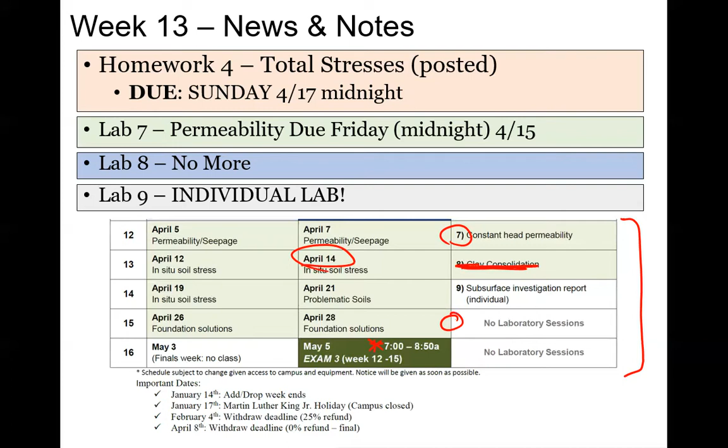Did want to go over exam 2 recap. Overall, it's kind of cool. It was better than exam 1. So good job, guys. Actually, you guys did much better than last semester's exam 2. We did see an increase.

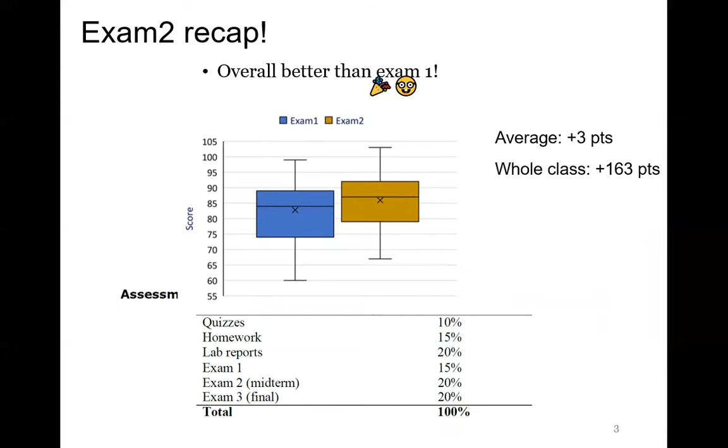You guys know I love a good old box and whisker plot. On average, it was over 3 points increase. The whole class, if you sum up how you did compared to exam 1 to exam 2, everyone, there was a net positive 163. For those of you who maybe didn't do as well as you'd hope on exam 2, don't pay too much attention to the Canvas grade that automatically calculates, because that's missing the lab reports. Your lab reports, the cumulative of your lab reports counts as an exam, basically.

Another big area to remind you guys of, the homework is 15%. So this homework coming up, please complete it, because we only have 4, maybe 5 homeworks. If you're missing one completely, that takes a big chunk out of it. If you haven't submitted a homework yet and you'd still like to, please come talk to me, and we can work on something for partial credit at least. Just wanted to remind everybody of the course assessment percentages, and to not rely on Canvas, because the lab reports are a little different.

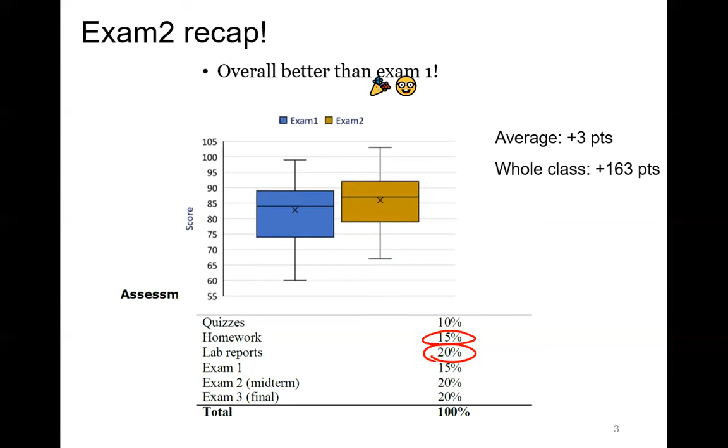I did want to review just a few aspects of the exam. If you want to go into more detail with the problems, or understand my grading scheme or anything like that, I'd be happy to talk with you guys in office hours. Just send me an email or stop by my office hours, and I'd be happy to go through your tests in more detail. Just a few of these things.

This one was kind of a trick question, and that's why I only took off 1 point if you got it wrong, because what this is looking for is classification, and a lot of you guys saw that you need to calculate the plasticity index, which is the liquid limit minus the plastic limit.

You then have to check the A-line criteria, right? We know the liquid limit is greater than 50, so it's going to be a high plasticity, but it could either be a clay or a silt. And all of this stuff here, we see that it's actually above the A line. So upon just initial investigation, just looking at this, you'd be like, okay, above an A line, it's a CH.

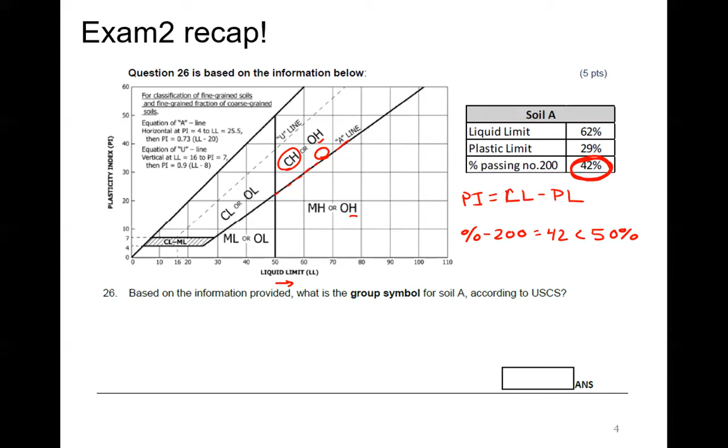But the thing to look for here that they like to put on the FE and on the PE is this one little detail that the percent passing, or the percent minus 200, is 42 or whatever it is, but it'll be less than 50%. This is like a really easy thing that they like to put on the PE and FE because it's just this one detail. So since it's less than 50%, this means it's a majority sand soil, right?

Because remember, USCS, this dividing line is plus or minus 50% passing the 200 sieve. So for the USCS, it's just the majority. So if 51% is less than the 200 sieve, the majority is a fine, so we call it a fine soil. If 51% is retained on the 200 sieve, then the majority is a sand, so we call it a sand soil.

So that's why this is not a CH, but instead this would be an SC, a clay sand. So for clay sands or for silty sands, these are 12 to 50% passing. So anything within 12 to 50% passing here.

I can hand them out after class, so don't worry about it. Anything from 12 to 50% passing is going to be a SC or an SM. In Florida, we come across SC or SM a lot because of this. Like 12 to 50% is a pretty big window, right? So a lot of times you could even get what seems like a clay in your hands, but it's actually an SC. So if it was below this line, then this would be an SM. So it's SC or SM.

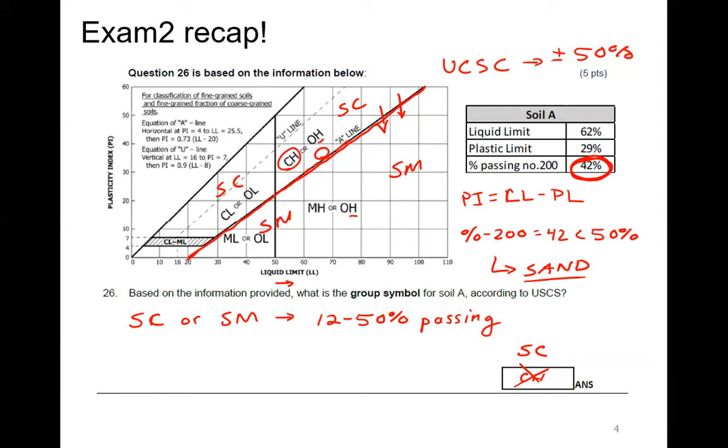All right, the other one that I saw some issues on was this flow net. I know usually flow nets, the examples we've seen is flow moving horizontally, but flow nets can also be used in any direction, right? And this is a really common application for dewatering, like a trench or something.

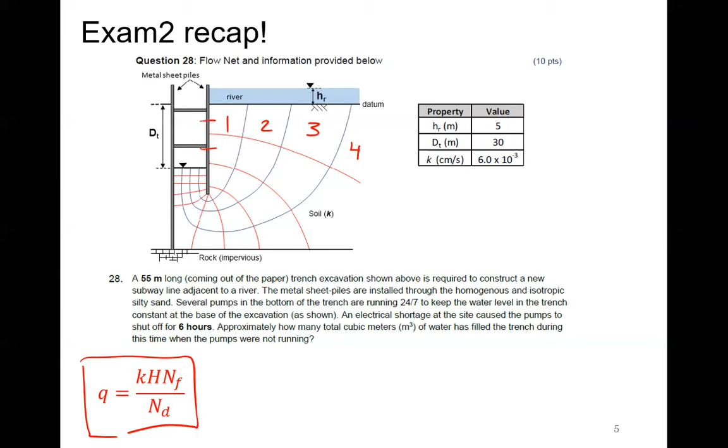So the big area that we have to remember—a lot of you guys saw that there was no issues counting the flow regions, so 4 flow paths and then all the drops, I think there's like 10 or something, I don't remember. But what we have to remember is this H is the difference in head.

And if you ever need to worry about, oh, I can't figure out what this is, just look at the difference between the triangles. So between the triangles here, we have one elevation here, this is a triangle, and we have one down here that the water is keeping in. So our H, our total head difference, is both of these combined—so the HR plus the DT. So it's 35 meters. Just keep that in mind.

These types of problems, again, are really popular on PE and FE because you have to think—they'll give you all these dimensions and you need to either add or subtract to determine the right difference in head for this. The other thing that I want you guys to always do is follow units. I always say that, and it's something that I didn't do in undergrad.

I didn't really learn until grad school, but literally 70% of engineering problems can be solved if you just put the units in, know what you need to find, and know either to subtract, multiply, or divide to get those units.

So we know for this, we need to find cubic meters of something. If we put the units into this value, our K is, let's just say, in meters per second. Our H is in meters. And our NF and ND are just unitless, they're just numbers. So this means our q is what is called a flux, meters squared per second.

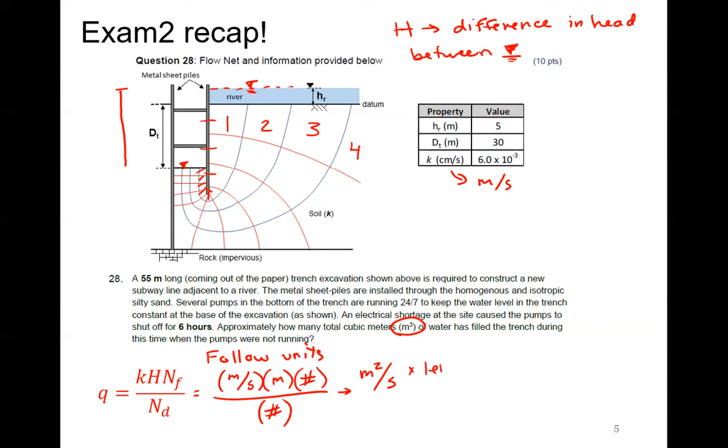So if this is the equation we know for flow net, and we need to get cubic meters, obviously we need to multiply this by another length. So that's where this 55 meters comes in. The 55 meters is length out of paper, coming out of the screen. So if we multiply this by another meter, then we'll get meters cubed per second. And so this is a flow rate, how much volume of water is moving over a certain time.

And we're given the time is 6 hours. So if the pump shut off for 6 hours, this means we would just multiply this by 6 hours and then put it into seconds or whatever we need to. So our seconds would cancel out and what we would get is our volume.

So you don't need an equation, you don't need to memorize anything here. All you need to do is follow the units and think about what you need to find and what you need to either multiply or divide by to get to that.

I saw a lot of you guys doing like the unit stoichiometry setup. If you're not familiar with this kind of setup, I definitely suggest doing this because it's easier, in my opinion, to cancel things out.

You don't have to set it up like this, but especially going from hours to days and stuff, like if we had seconds, you do 60 seconds is 1 minute, 60 minutes is 1 hour, whatever that is. So in my opinion, I think this is an easier way to keep track of your units.

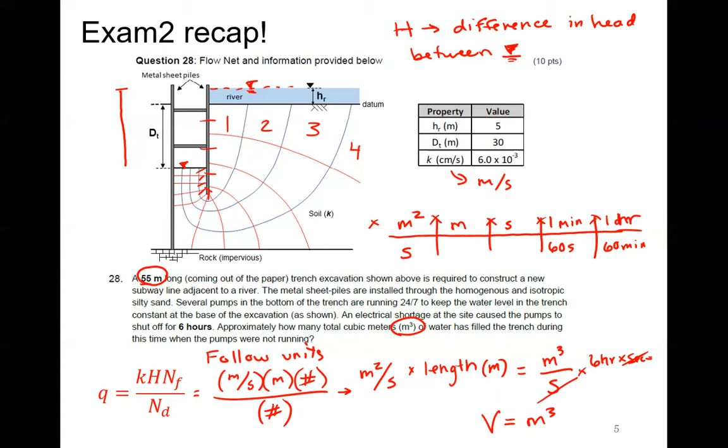Okay, cool. All right, today we're going to be talking about capillary rise and how it changes the stress conditions. Luckily, I think a lot of you guys have covered capillary rise before, was it in fluid mechanics, right? So that's from a pipe standpoint or something, but in ground conditions, this is super, super important.

So we've talked about already from the previous slides and lectures how the groundwater changing can either increase or decrease our effective stress. And again, just to recap, effective stress is the important stress for geotechnical engineers, because we are designing strength as a function of stress, and this stress is going to change with groundwater conditions. So we want to design our strength off of a stress that is taking out the groundwater, just assuming that it doesn't add or subtract any stress. That's why we do effective stress instead of total stress in our design considerations.

So this is assuming one thing though. This is assuming if we were to look right at this soil interface here, that it's a perfect line, right? Like we have 100% saturation versus 0 saturation, so completely air dry, and then it magically turns into 100% saturation. You can probably imagine that this is not the idealized case, right? Like we've already seen how moisture content is a thing in soil. Clays will have moisture content, sands will generally have moisture contents.

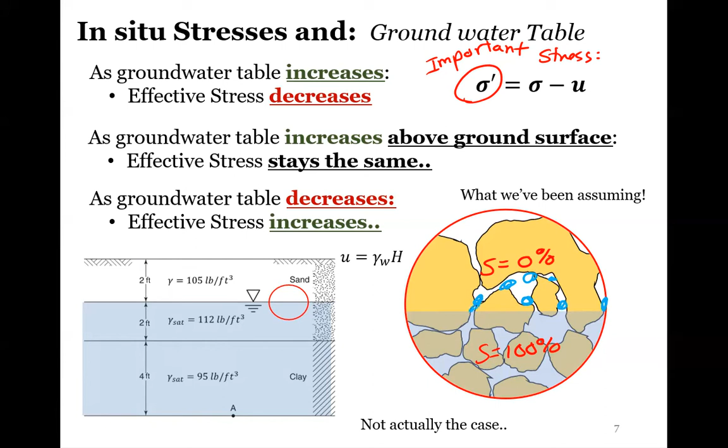So there's going to be some type of water that is in this pore space above our groundwater table that we need to account for, that can affect the stress.

And what we know from 5th grade science, there is water surface tension as a property of water, the cohesion and the adhesion. Did anyone do that thing where you take a penny and put a bunch of water droplets on it? My wife was a science teacher and I remember always doing that.

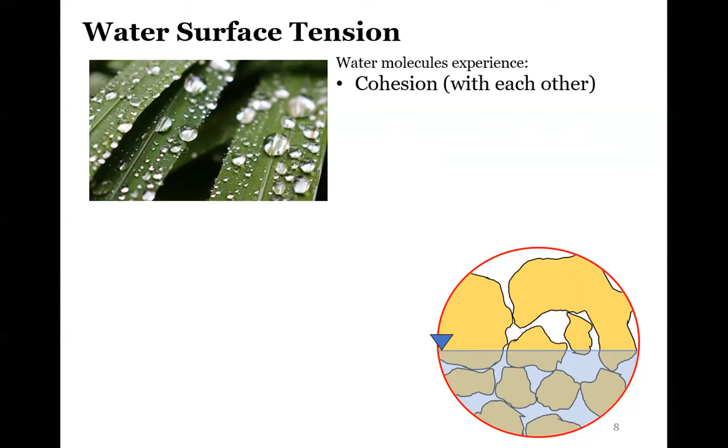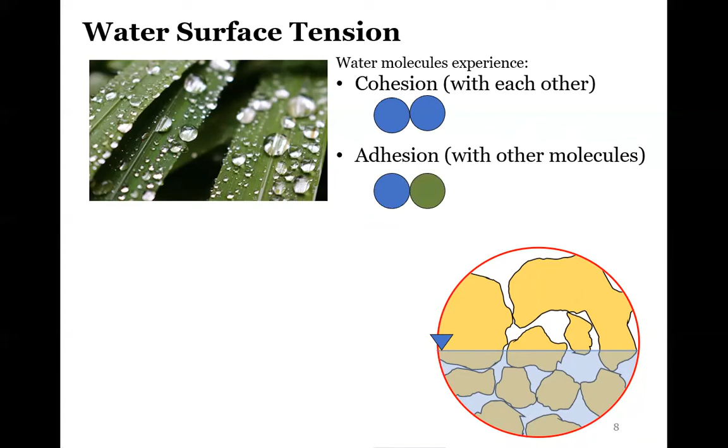So we already know that water molecules experience cohesion with each other, and adhesion with other molecules. The cohesion is between similar particles, adhesion with other molecules. And we see this due to this effect, we have what's called capillary rise. We've all probably seen this with paper towels, right? Capillary rise, where water seems to defy gravity, and since it's wanting to stick to each other, it moves up through this pore space.

So we actually see the same thing occur in soils. If you think about it, a paper towel with all these small pore spaces is very similar to soil with a lot of small interconnecting pore spaces. So this is the movement of water due to internal forces.

And what actually causes this from a stress perspective is suction. So suction actually causes this. So if we're talking about a stress distribution, especially for pore water pressure, what this is actually causing is a negative stress, a negative pore water pressure that's moving the water up.

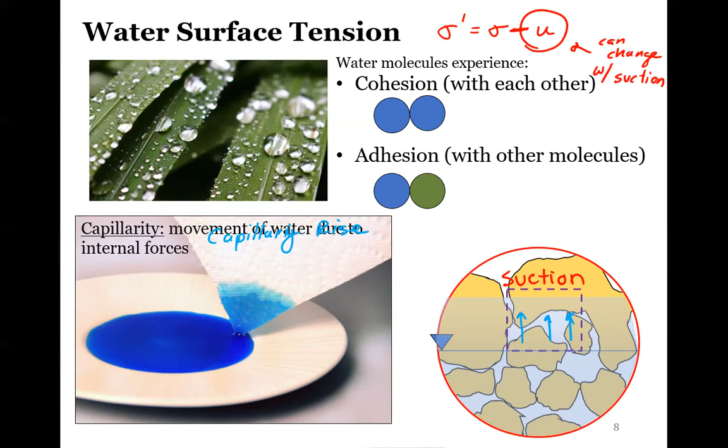And remember, if our effective stress is equal to our total stress minus our pore water pressure, this pore water pressure can change with suction. If this becomes negative, then what we're doing is subtracting a negative, and this actually increases our effective stress. So this is something that we need to account for in our effective stress.

So what they did a long time ago, you guys have seen this before, where if you put a straw in water, the water will actually travel up the straw, and it's a function of the diameter. I don't need to go through all of this derivation here. But in groundwater and soil conditions, we're assuming this diameter of the capillary tube is very, very small. So the height at which the water will rise through a pore space is inversely proportional to the diameter.

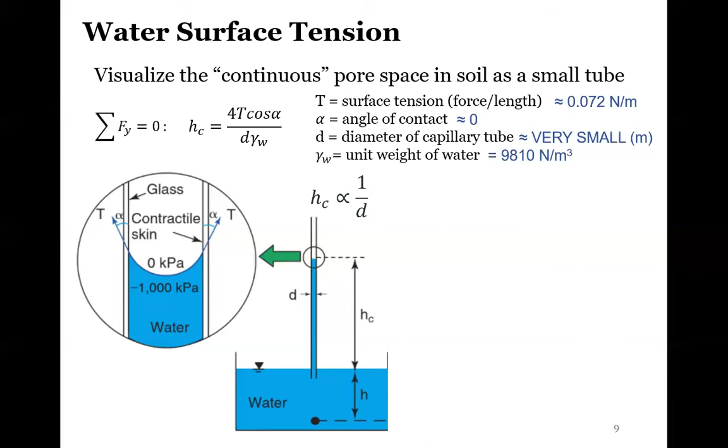So the smaller the particle, or the smaller the pore space, then the more we'll see a capillary rise occur.

So if we were to actually draw the pore water pressure in this example, what we would see is that below the groundwater table, again this is the pore water pressure, it increases like we'd expect, the height times the unit weight of water. And above it, it's actually in 100% suction, so we just see this negative value. So we actually have a negative pore water pressure moving up.

So this isn't a case for looking at only pore space, so no soil. In this case, we would actually see that this would increase the effective stress.

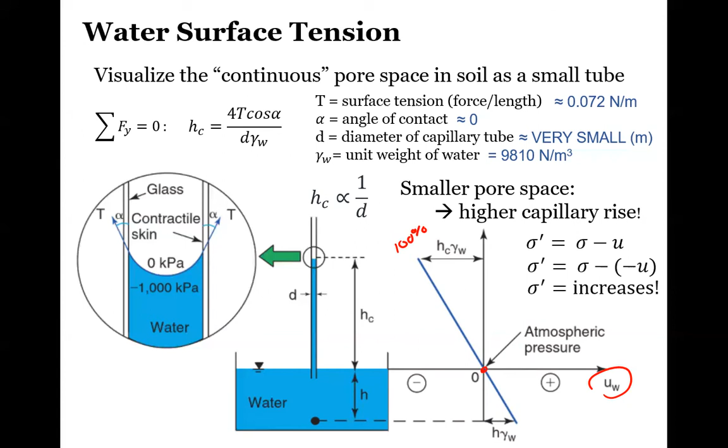So the pore channel is impossible to measure in soil, if we actually think about it. We can get an idea of the size of the pore channel, but we can't actually understand the exact length of a pore channel. There's just too much variability in the soil conditions.

What we do say is that there are some estimates of how much the water will rise in soil as a function of the effective size, or the grain size distribution. So it's a function of void ratio, and then this coefficient of 10 to 50 millimeters squared. These are just some of the accepted criteria. The big thing to remember is that the smaller the pore space, the more the capillary will rise.

So this is why we usually assume that clay is 100% saturated if near the water table. Like in Florida, for example, the water table is never 75 feet below the ground surface. Maybe sometimes, but most of the time, if you encounter clay, you're going to assume that it is 100% saturated because the capillary rise has already occurred in this clay layer. So unless already given to you, or unless tests were performed and it was provided, you usually assume clay is 100% saturated if near water because of this.

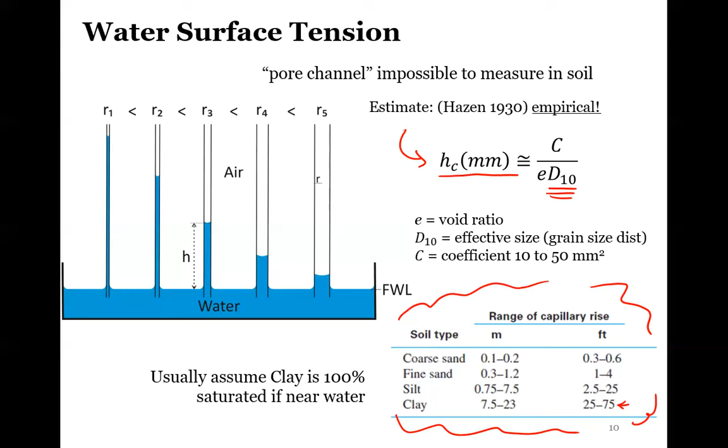So over geologic time, capillary rise does not necessarily mean that the saturation is 100%, especially in granular soils. If we have saturation of 100%, this means that we would just use our pore water pressure except in the negative term. So we add a negative onto it, and the height at which it would rise, our HC, is multiplied by the density of water, and we subtract that out, and that would be our 100% saturation.

So this would be our 100% suction too, right? Because it's just a pure negative pore water pressure. But sometimes we can still have a moisture content, and we can still have water under capillary action, but we won't have pure 100% saturation. So we'll still have air voids in our mix.

If that's the case, what we have is this equation. So what we just say is that the negative, or the suction, is the negative pore water pressure, or the suction, is just a percentage of whatever the saturation percentage is. So if the saturation percentage is 50%, then our pore water pressure is negative 50%. If it's 20%, then our pore water pressure is negative 20% or whatever. So it's a really easy, it's still a linear equation, even though realistically, we don't see this.

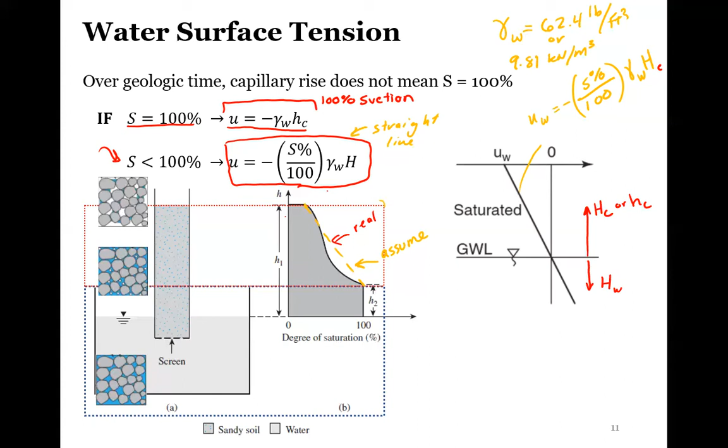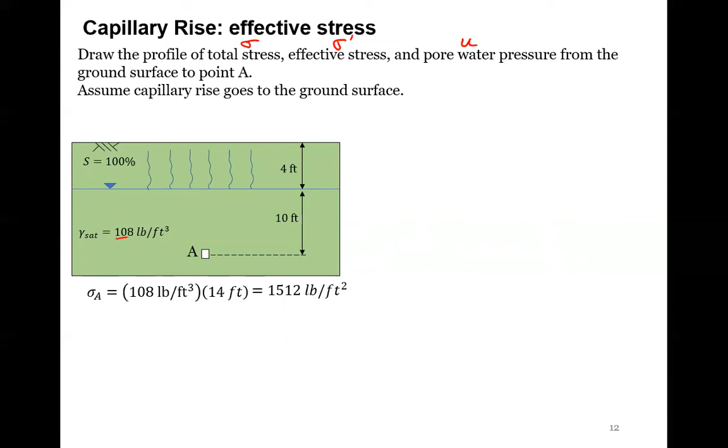Let's just look at a really brief example here of this — I think I have two of them. For this, we're just asked to draw the profile of total stress, effective stress, and pore water pressure. Again, our total stress is sigma, our effective stress is sigma prime, and our pore water pressure is U. The total stress in capillary action will not change at all, so for our total stress, we can calculate it just like anything else. At point A, we have 14 feet of a material that weighs 108 pounds per cubic foot, so feet times pounds per cubic foot gives us 1512 pounds per square foot — that's our stress at point A, our total stress, everything that it's carrying.

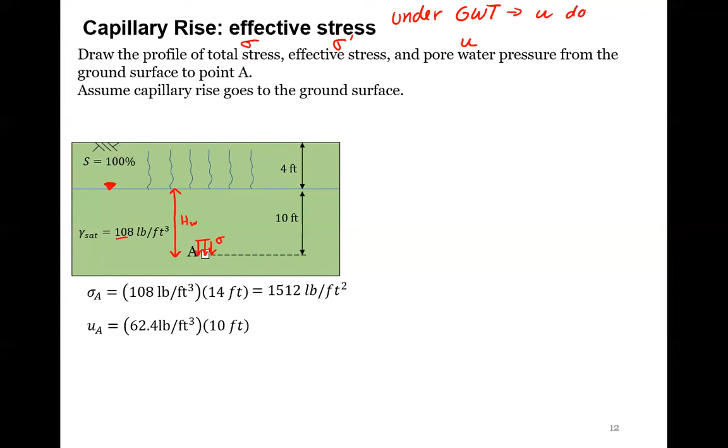So the pore water pressure at point A, if we were swimming at point A, what we would feel is 10 feet of water above us, right? Because the head is right here — this would be our HW. We do not feel the capillary zone because this is unsaturated, or it's saying saturated here, but this is under suction. So it's not actually changing the stresses when you're 100% submerged, like at point A, for example. We'll see how that changes whenever we get closer to the groundwater table. But under the groundwater table, the U does not change.

Think of it like swimming under 10 feet of water in a pool. If somebody put a sponge on top of the pool and water starts soaking into the sponge, that's not going to change anything underneath the water. You'll only have the stress changes at the surface.

For that, it's easy to calculate: 624 pounds per square foot. That means our effective stress is our total stress minus our pore water pressure, 888.

Okay, let's look at it at the surface. Let's just say this is 0.0, at our ground surface. Let's do the stresses at that location. Separate this - this is ground surface elevation, GSE.

So our total stress at this location - how much are we holding up at 0.0? There's nothing above us, so our total stress is 0. You don't have to hold anything. You're doing good up there.

Our pore water pressure, though, if this is 100% saturated, what we have is this negative HC. So we have 4 feet of suction occurring, and this is our HC. So we would have 62.4 pounds per cubic foot times 4, and that's negative. So we would actually have negative 25 pounds per square foot of pore water pressure.

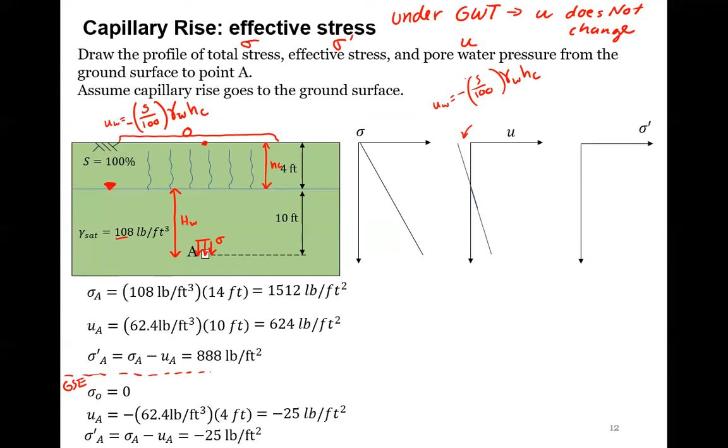So that means our effective stress is also going to equal or have a negative suction. But one of the common problems you'll see is: how do we actually determine at what depth will we have negative effective stress? What is this depth of negative? This is important because we need to either remove this or add something to reinforce this area.

So to actually do this, we need to do our triangles from back in geometry class in high school. But we know that this value here is -25. We know that this value here is 888. So we know these two. We know the total depth is 14 feet.

Pretend that's a straight line - it's 14 feet. So what we can actually do is set up a system of equations knowing that they share a similar apex, so similar angles here. Thanks to triangles, these angles are the same. So we just set up this system. Does everyone remember doing this back a long time ago? Did you ever think you'd use it in a junior level engineering class?

Here we are. So what we do is just solve for x here. Solve for x, we'd see that x is 0.41 feet, and that's the depth then that we would care about right here. So this would be our x value.

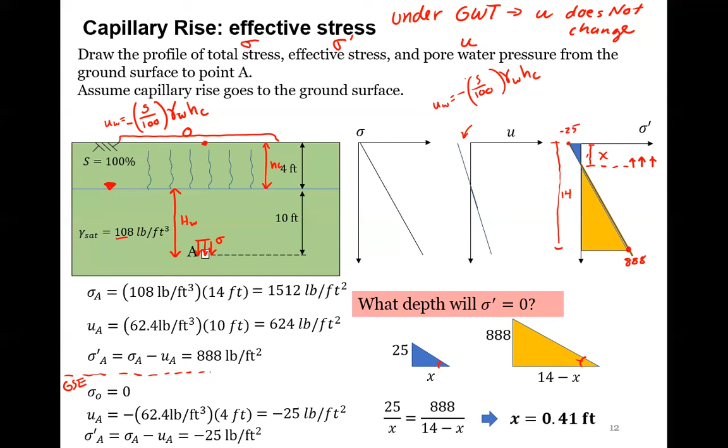All right, so let's look at another example. We're given the capillary rise.

These conditions here, we have a sand and then maybe a silty sand or a saturated clay, and then a sand. So there's capillary rise occurring in the sand. These dimensions are shown here.

We need to plot the variation of total, effective, and pore water stress with depth. So we're told we're just assuming that this is 100% dry, so saturation is 0, there's no water in this area. Below that, though, we have a moist unit weight zone where the saturation is 50%. And then we have a saturated zone underneath that of 112 pounds per cubic foot.

So what we do is, if we need to plot the variation with depth of total, effective, and pore water pressure, we just take this one step at a time, so just take A, B, C, D. So let's start at point D. I always think it's easier to start at the bottom and think about everything that is being held up, and then you just subtract them as you go.

So at point D, for our total stress, sigma D, if you were hanging out at point D, what would you be feeling above your head? You'd be feeling 10 feet of this layer here, that would be 112 pounds per cubic foot. You'd be feeling 5 feet, because this is 5. So let me just put these numbers here: 5 feet, 10 feet, 10 feet.

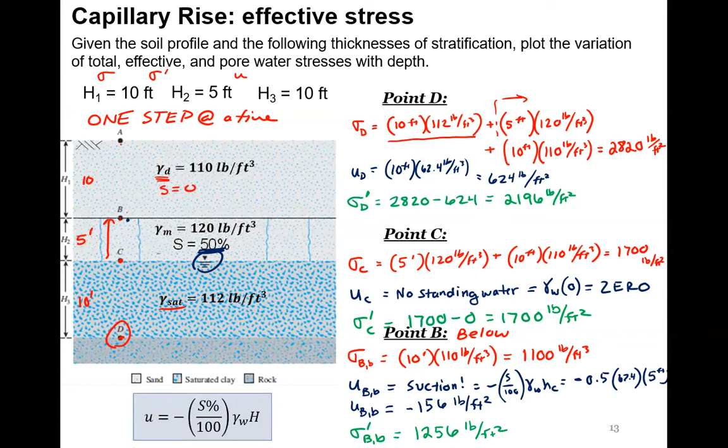So again, what this is assuming - unfortunately, if we zoom in at this location here, what's going on? Let me erase all that. If we zoom in at this location at point B, what this is still assuming is that there is a hard line. So we're still assuming - come on, go to red. It does. There it is, cool, never remember what I delete or not. Anyways, at point B they were still assuming there's this hard line of capillary rise and not. So even though the whole capillary rise concept is to avoid that assumption of the groundwater table being 100% saturated and 0 above and below it - this hard dichotomy - at point B we still have this issue.

So at point B above - now let's look at it above. So what we're talking about now is like right here.

Let's see what's going on here. Okay, so at point B above, let's just say this is sigma B A. Now our total stress is still the same. We have 110 pounds per cubic foot times 10. It's a 10, I swear. So we still have the same total stress.

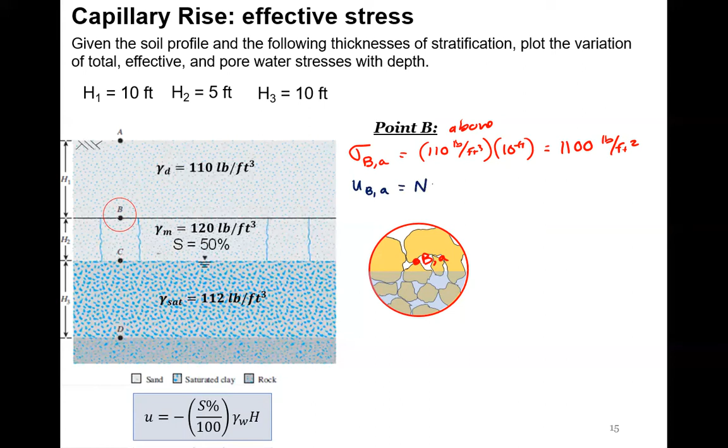But now our suction at this location is nothing. So we have no suction above this because there's no water, there's no capillary rise anymore. So this means our pore water pressure is back to 0. This means our profile is going to go from a value to 0, which means we're going to have a flat line. So we're still going to have this discontinuity of the profile. But that's okay. So this means our effective stress is equal to 1,100 pounds per square foot.

Okay, so at point A, everybody should already recognize by now, our total stress is - what's being held up above from point A? 0. Our pore water pressure is 0. And then that means our effective stress at point A is 0. So we got zeros all over.

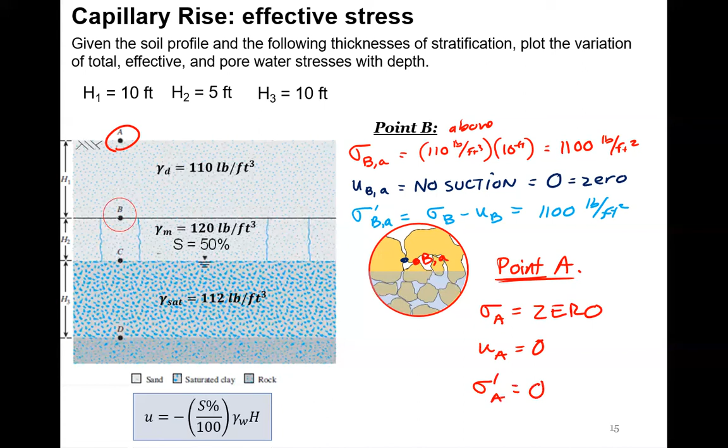All right, so let's plot this, let's show the profile now. So to fill this in really quick, just to recap, at point A, we have zeros all around the board. At point B above, we have 1,100, we have 0 pore water pressure, which means our effective stress is 1,100. At point B below, just below, we still have 1,100 here, but we have suction of negative 156 due to the capillary rise. So we're at 1,256 for our effective stress.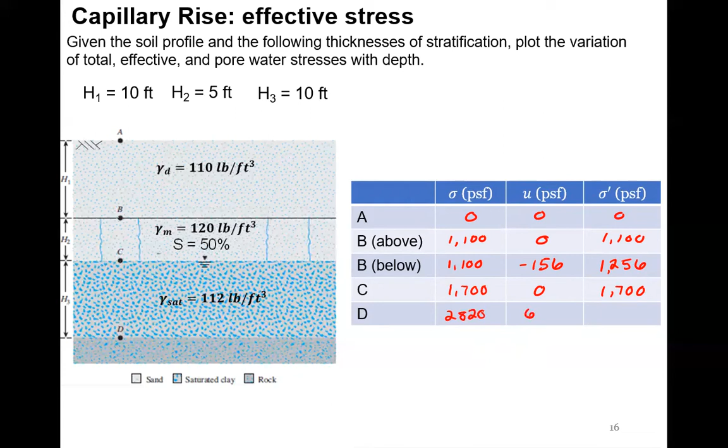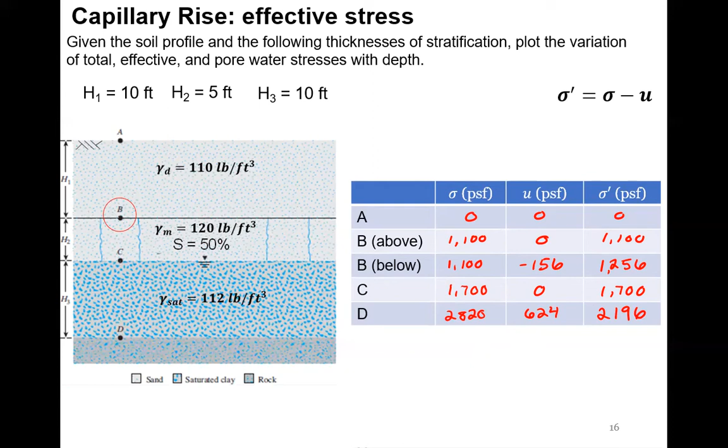At point C, we have a total stress of 1,700. Our pore water pressure, though, is 0 because we're at the groundwater table. So this means we have this, and then below point C, it's just like normal from the previous lectures. Maybe I wrote that down wrong, I don't remember. We have all these values. So I think it's always easier first to put it in table form and then plotting it, just so you can double check your answers.

So if we were to actually plot these now, what we would see is something like this. So again, the slope of our total stress is going to be dependent on our gamma of the soil, whatever that is, dry, moist, saturated. If it is a higher number, we would expect to see that slope being wider, a shallower slope because it's moving forward on the x-axis faster with depth.

Our pore water pressure is the tricky part here because we have this zone of suction, which causes a negative value. Now, right at point B, remember, we have that discontinuity because of directly above and directly below. So anytime we're actually showing this in plot form, we just keep it at the same depth, we just have 2 points. So if you're digging down, right at point B, you hit a negative value at 10. So make sure to always include this value here. If you don't have this value, then it's going to plot something like this, and that's not correct because above that, we still have negative or 0 pore water pressure. So you need to include that second value there so it shows that discontinuity.

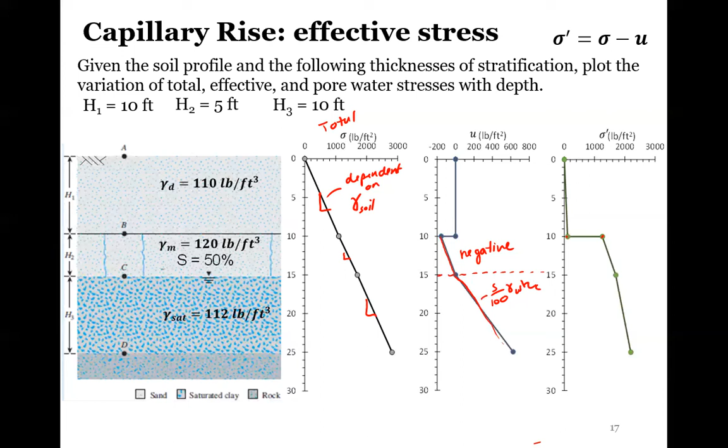So what we've just been covering was vertical stresses. Again, zooming in here - vertical stresses, if we have a load from soil above it, we're assuming it's transferred through the intergranular stress, and this is our sigma prime. But then it ultimately transfers to something below it too.

So if you took a scoop of sand and poured it on the table, what would you notice happen to it? Would it only go vertically? It would also spread horizontally, right? So although vertical stress is super important, we also need to consider horizontal stress, because this loading isn't just going to be transmitted perfectly vertically - we're also going to have particles moving horizontally. So if we have this vertical, we would also have this horizontal section.

Now the question is, with water, we see this effect too, right? We would also see the water pushing out this direction. But the interesting thing with water is that if you were to pour it on the surface of a table, what would happen? It would spread completely laterally, right? So all of the vertical stress will be transmitted horizontally because there's no strength to it - it just falls out. Unlike with soil, if we were to pour it on a table surface, it would not spread out completely horizontally. There would still be some type of vertical strength holding it in place.

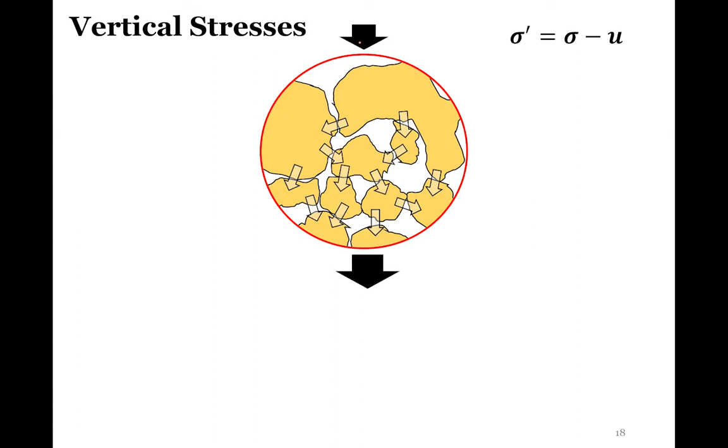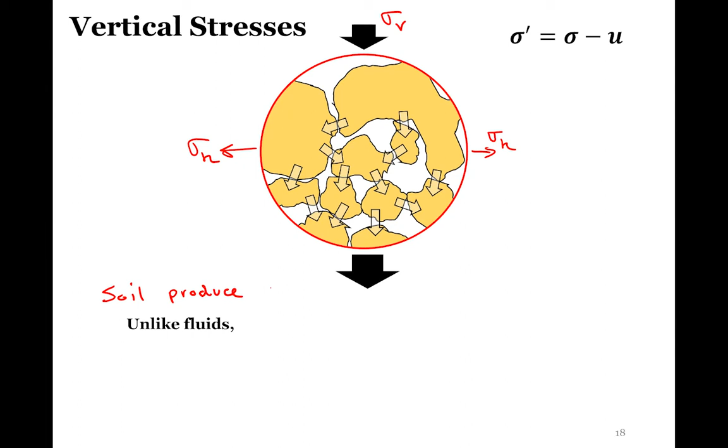So what we were talking about was that there is vertical stress that is then transmitted through the intergranular stress and all that fun stuff. And what we actually have is a resulting horizontal stress too. So if we call this sigma V, what we'll use is this horizontal H - this is also called lateral stress. And what we actually see is that this soil will produce a horizontal stress that is also increasing with depth.

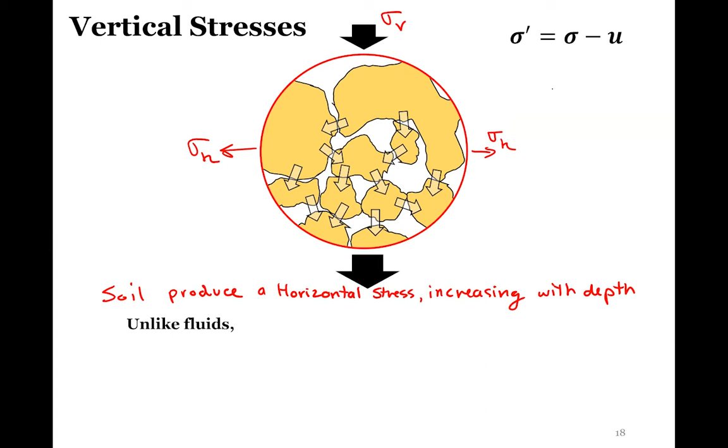Again, I was talking about this - if you take a cube of water, let's say this is a cube of water, and it's not being bound by anything, and you put it on the table, it would just splat, it would move horizontally. This is water, and all of this vertical stress will move horizontally. So what this is saying is that as this water is confined, the pore water pressure, the U, is equal in all directions. This kind of makes sense because, again, putting it on a table, it will splatter out.

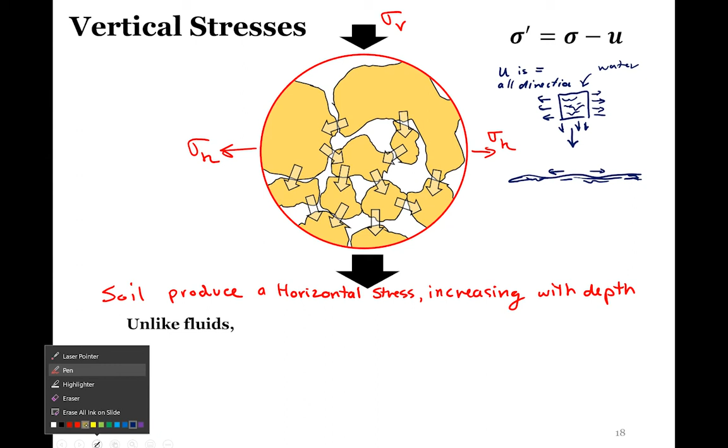If we did this with a cube of soil, let's say this is sand, and we dropped it on a table, we would see a little bit of movement horizontally, but there will still be some type of vertical stress. So unlike fluids, the horizontal stress of soil - I'll use the correct terminology - sigma H, horizontal stress, is not equal to vertical stress.

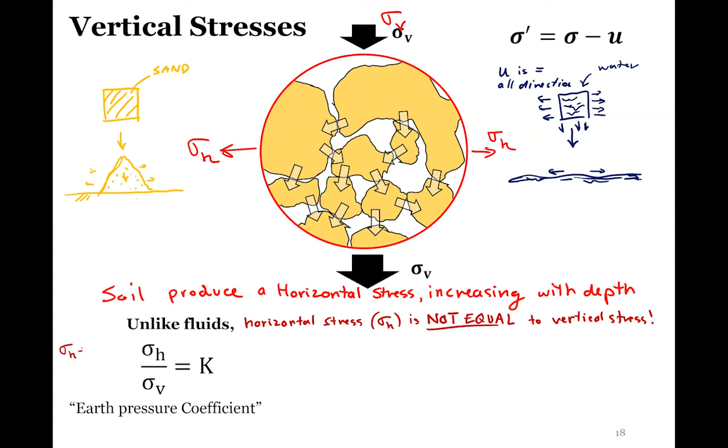What we do see, though, is that it is proportional. So if we took our horizontal stress and divided it by our vertical stress, what we get is called an earth pressure coefficient, K. This is derived simply from knowing that our sigma H is equal to a constant times our sigma V. In geotech, we don't trust the water, so total stress can change over time, so we use effective stress parameters. Our effective horizontal stress divided by our effective vertical stress is equal to this K value, and we put a little circle at the bottom - this is our at-rest earth pressure coefficient.

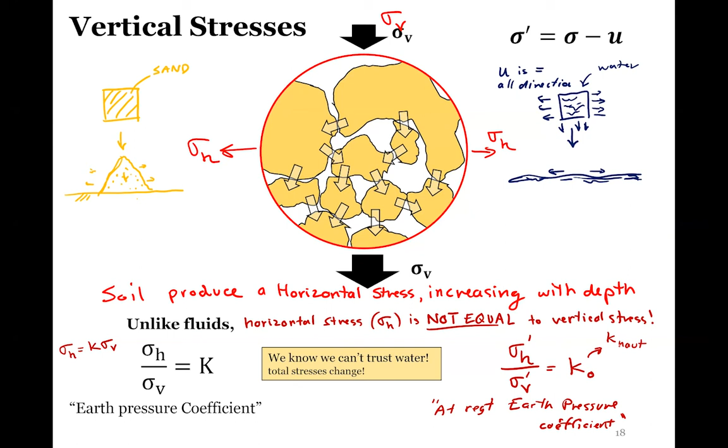This doesn't mean it's at rest. Sometimes this is called K naught, as in K zero. I don't know where that term comes from, but K naught is just what it's often referred to as. This at-rest earth pressure coefficient does not change in homogeneous soil, so it's constant with depth.

The typical ranges of these are anywhere from 0.2 to 0.5 in dense sands or clays. But if we have loose sands or preloaded soil, this value is higher, above 1, so 2 to 5. Think about what this is actually telling us.

If our K naught value is greater than 1, what does that mean for this ratio? If it's greater than 1, that means our horizontal stress is actually going to be larger than the vertical stress. Now, if you look at these values, we see this occur in loose sands, and that should make physical sense to us.

If we had a loose sand and we poured it out onto a table, what we would see is this loose sand would spread out horizontally. So spreading out horizontally means the sigma H, the horizontal stress, is going to be more than our vertical stress.

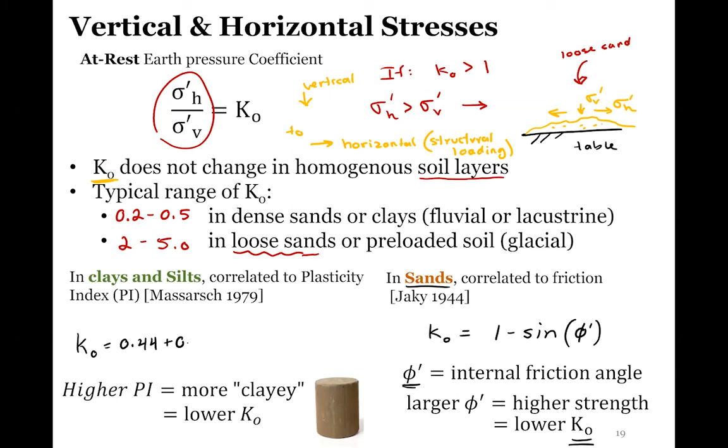0.42 times PI in percentage divided by 100. So our PI is our plasticity index, which is our liquid limit minus our plastic limit.

And this property is what we call empirical, which means it is correlated using lab testing, and then a statistical function is fit to that correlation to use as a prediction. Remember where this PL is coming from - this PL is the Tootsie Roll lab, the rolling test. So as sketchy as that test was, we still use it to correlate to a very important parameter called K naught.

So just keep that in mind when you start working in geotech, or you work with a geotech. A lot of these things need to be taken with a grain of salt and with a little bit more of an understanding of where the actual value is coming from. Regardless, these correlations are good for clays and silts only, and there's lots more out there.

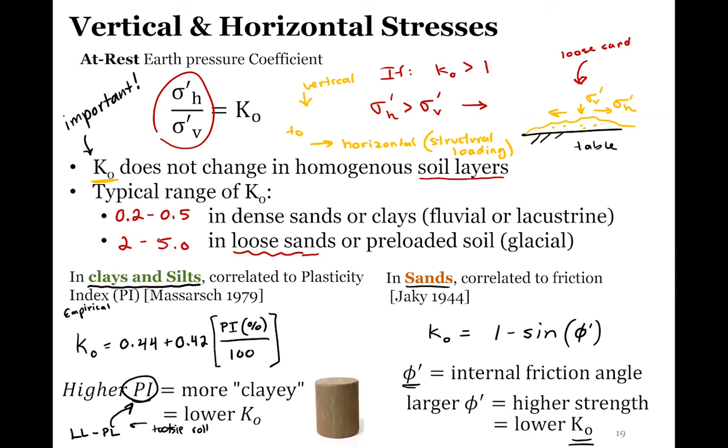If you take my design and analysis of foundations class, offered in fall of this year - it's kind of like part 2 of this class - we talk a lot more on this K naught value. Let's talk about why we care about stresses overall. Again, the at-rest earth pressure coefficient, our horizontal divided by our vertical, is equal to our K naught.

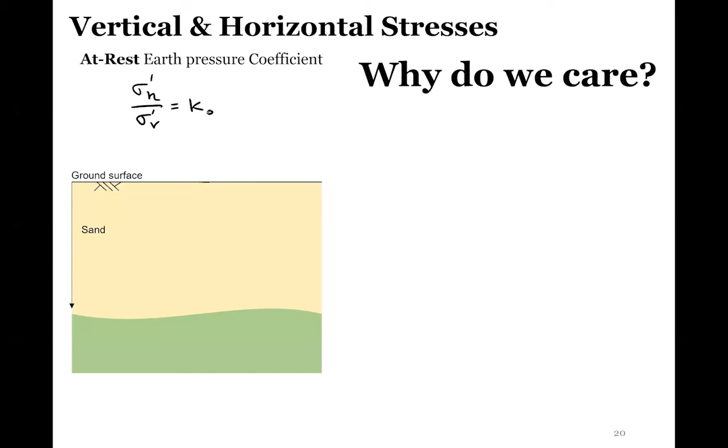So why do we care? Vertical stresses, it makes sense - soil compressibility, which is the change in height at the ground surface, or the settlement. Our soil strength is dependent on that, which is why we use our vertical stress. And then quick conditions: when our vertical stress goes to 0, this could cause issues with loss of strength. This is something we want to guard against.

Horizontal stresses - this is when we start actually looking at the application of structures. So for example, like a tunnel being built, we not only need to design this tunnel to combat against the vertical stresses above it, but also the horizontal stresses. So for any type of tunnels or subterranean structures, horizontal stresses are very important for the actual design.

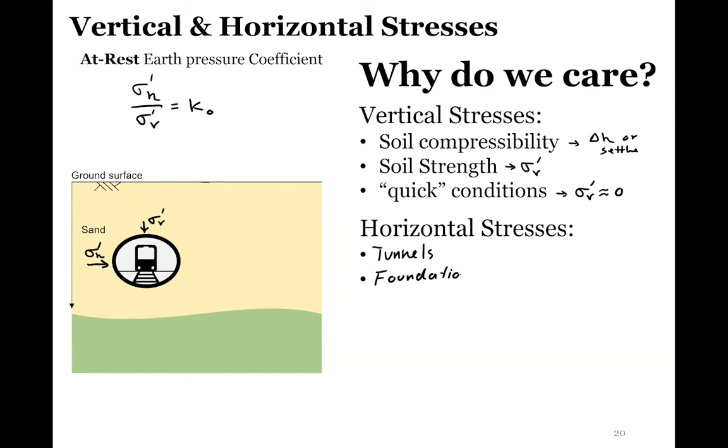The foundation strength is just as important too. Foundation strength, like for piles, for example - that friction on the pile is a function of the horizontal stress for tension piles or compression piles. So I'll just say, for piles.

That's another one would be for excavation. This is very, very important. Excavation.

We don't really have excavations too much in Florida, but in the rest of the country where they have these things that are called basements, we need to change the ground surface elevation so we can construct into the ground. So we do this through retaining walls or sheet pile walls or something, some type of wall where we need to hold back the soil.

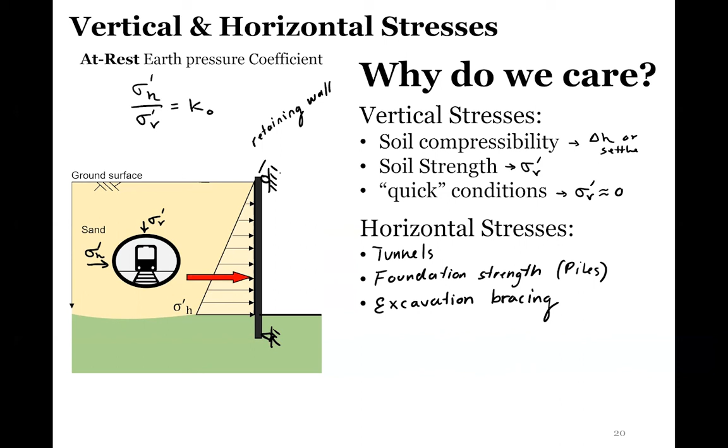And that soil is going to exert a horizontal stress on this structure. So if you think about this retaining wall, we need to do a structural design just like we would for a structural analysis beam from our other classes. So this loading is going to produce a force, right? This force is going to be called P naught, or an at-rest horizontal force, and it's measured in kips or pounds or something like that. This is what we actually need to design against.

If you think about this from a triangular load, like if this is just a triangularly loaded beam, a triangular distributed load, then we can create a function for this. Our P naught is equal to 1/2 times K naught, our at-rest earth pressure coefficient, times sigma H, or gamma H, which is equal to this. So it's base times height divided by 2 for the area of the triangle.

And this is really important in the actual structural design, to make sure that what we are designing structurally, a retaining wall or something, is not going to collapse. So K is crucial for design of retaining walls. K naught. There's also other types of Ks called Ka, active, or Kp, passive, but we don't have time to really get into that. That is talked about a lot in future classes, strength of materials or design analysis foundations.

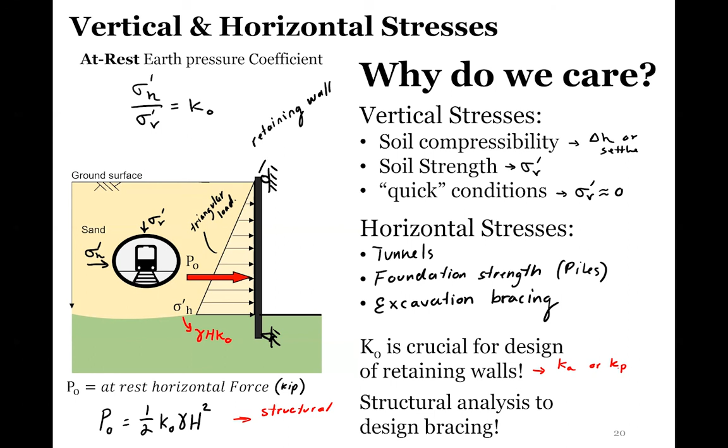So, structural analysis to design bracing. Let's just show an example of where this issue could actually go wrong. So this is an excavation, a massive excavation. I think it was in Turkey or someplace perhaps.

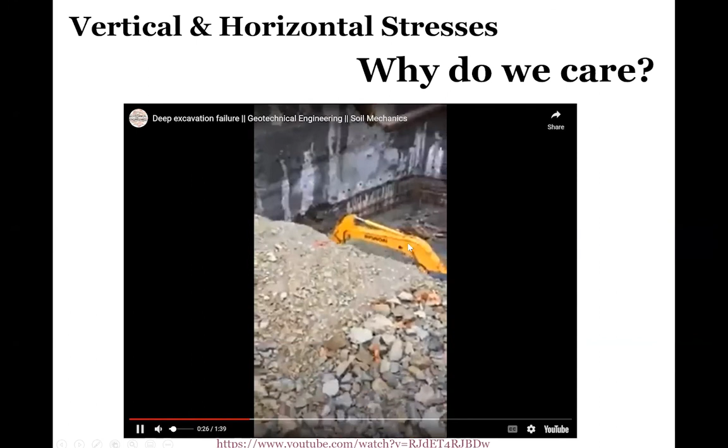Again, the whole purpose of this is to hold back soil so they can build something underground, like a basement or a parking structure, something like that. So this whole thing is designed based off of this K naught value, which is a soil property. You can see here the soil is actually pushing so hard on the wall that it causes the bracing to buckle, and now you hear the popping of everything else starting to move.

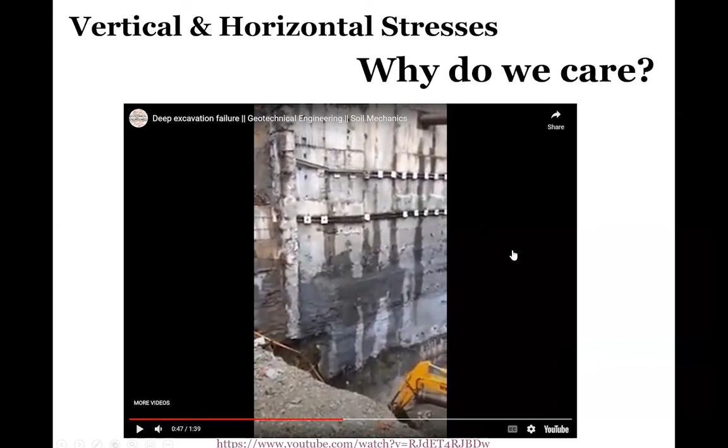All right, who wants to guess what happens here? Well, of course, the issue with geotechnical structures is we design things that are massive and affect entire structures and communities nearby. So if this thing collapses in, then obviously it is affecting all the structures surrounding it too. So we have a lot of movement of mass of soil.

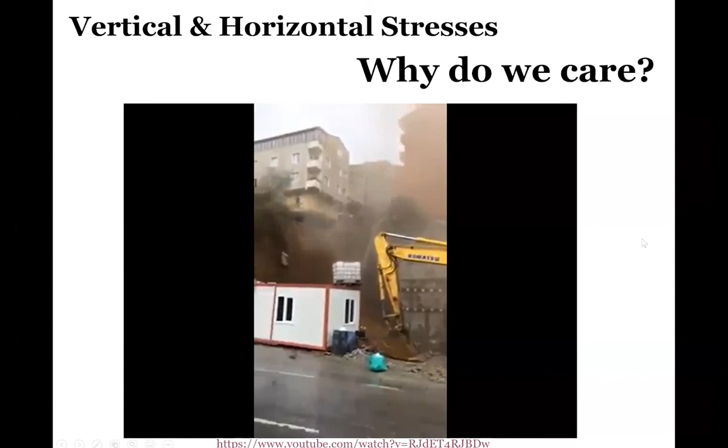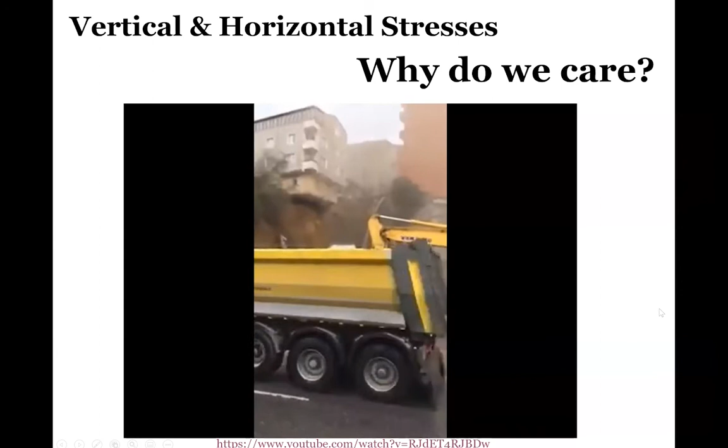And you can see it'll zoom in here. Oops. What do you think the property value of that is? If it was in Jacksonville Beach, it would still be worth probably like $4 million. But here it's probably not good for the structure and the homeowners and everything else in the surrounding area. This guy's upset, he's like, oh darn it.

Oh yeah, so this is all based off of this K naught value, or something similar called Ka probably. You can see why this is super important, and why understanding the horizontal stresses are more important for design considerations and stuff.

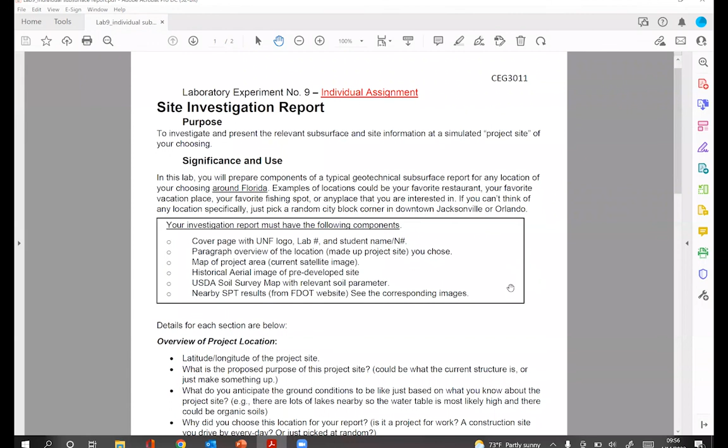All right, what I want to do is, hopefully you guys are still there, go over our lab 9 really quickly and go over the details regarding this. Again, this is our individual assignment, so you're not working with your lab groups.

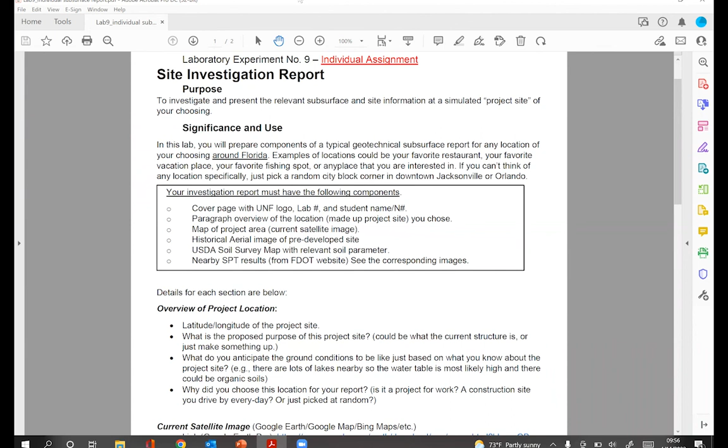What you're going to be doing is producing a site investigation report. The purpose is to investigate and present the relevant subsurface site information at a simulated project site of your choosing. It can be anywhere you want, preferably in Florida—you can do other states, but there's just not as much data available. It could be your favorite restaurant, favorite place to eat, a landmark, your church, your house, whatever you want, any location—you just choose it.

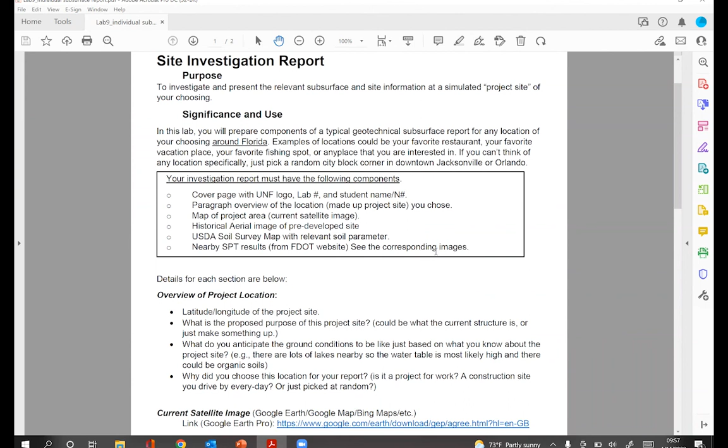You're going to be utilizing the subsurface investigation tools that we went over the week after spring break in those videos. So if you haven't watched those videos yet, you're going to have to, because you need to know how to use these websites and tools for geotechnical engineering report purposes.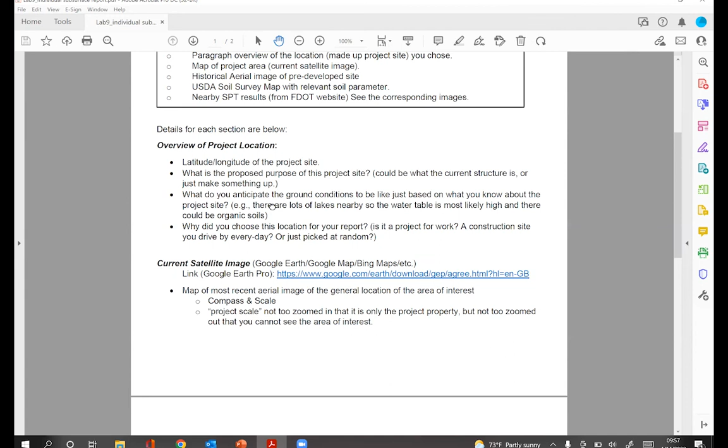So what you're going to do is choose a site first. What is the proposed purpose of the site? Could be what the current structure is, or just make something up. What do you anticipate the ground conditions to be like based on what you know about the project site? And why did you choose this location? Just for a random project, a construction site you drive by every day, whatever.

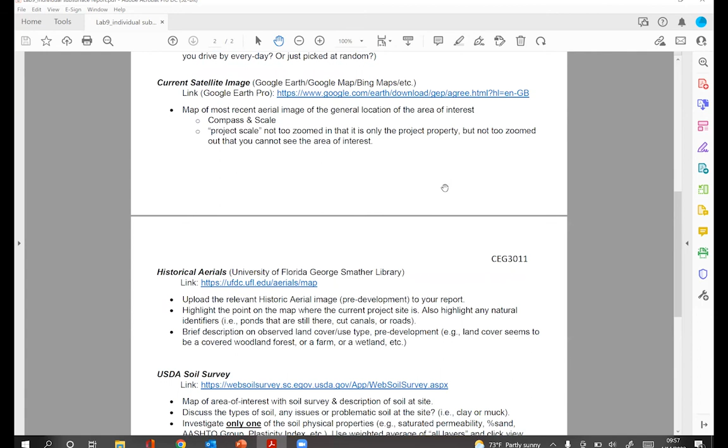The four things you're going to include: first, the current satellite imaging of that location. The map must be recent aerial images. You can use Google Maps, Bing, whatever you want.

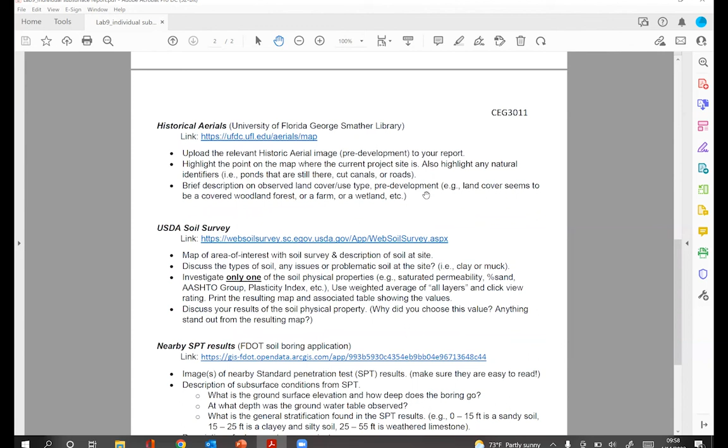Second, historical aerials. You're going to use the University of Florida's historic aerial database and look at the site pre-development, if you can—some sites might be old enough that you aren't going to have that. But the key here is to look for signs of potential problems later on down the road, like was there a pond that is now filled, cut canals or roads, did it seem to be a wetland or woodland forest or farm, or a previous sinkhole that was filled in nearby—anything now buried in history that could affect the structure or construction process moving forward.

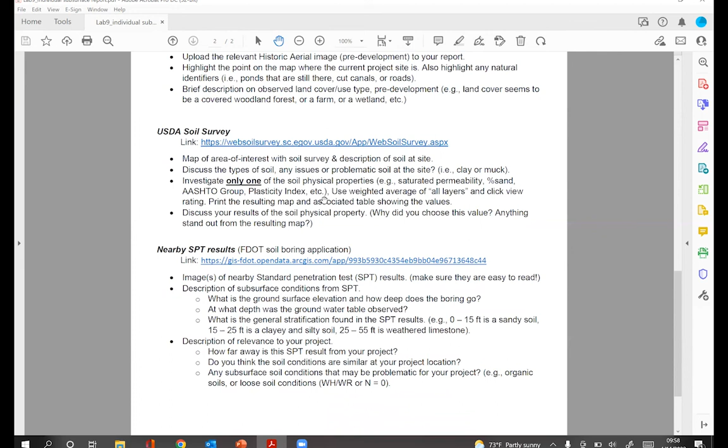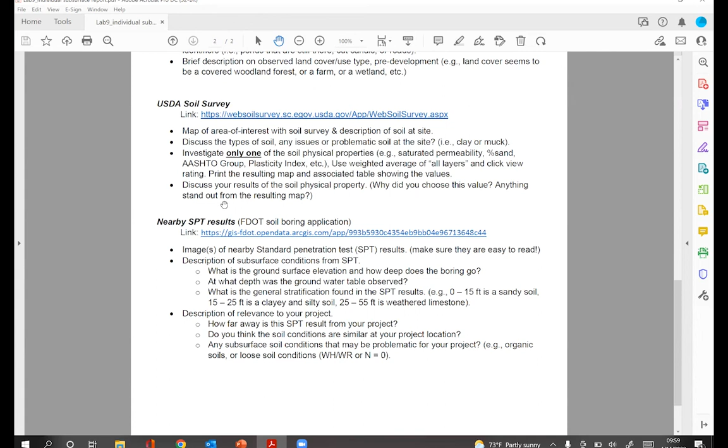You're also going to use the USDA soil survey link and map the area of interest. You're going to investigate only one of the soil physical properties—in that video I talked about all the different soil properties we can determine from the USDA soil survey map. You're going to just pick one and explain why you chose it. Saturated permeability is usually the most popular one because you've got to design stormwater and stuff in a project. Discuss the results of the physical soil property, why you chose this value, and so on.

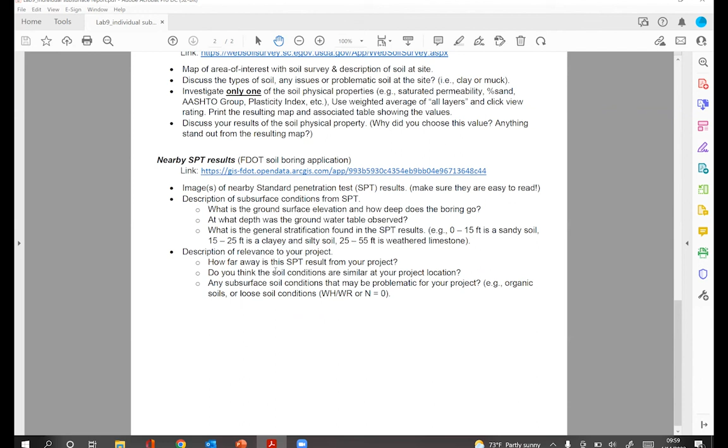You're then also going to access the FDOT soil boring application and search your location to see if there's any nearby SPTs or CPTs or subsurface testing. If there is, include a brief description of the subsurface conditions found and a description of the relevance to your project—how far was the SPT from your project site, do you think the soil conditions are similar at your project site, and so on.

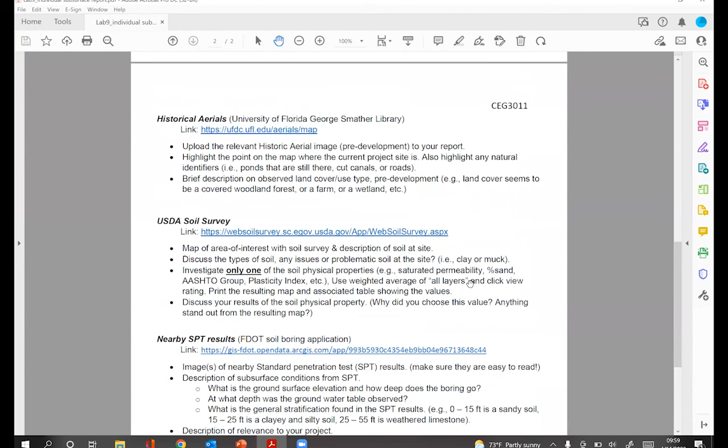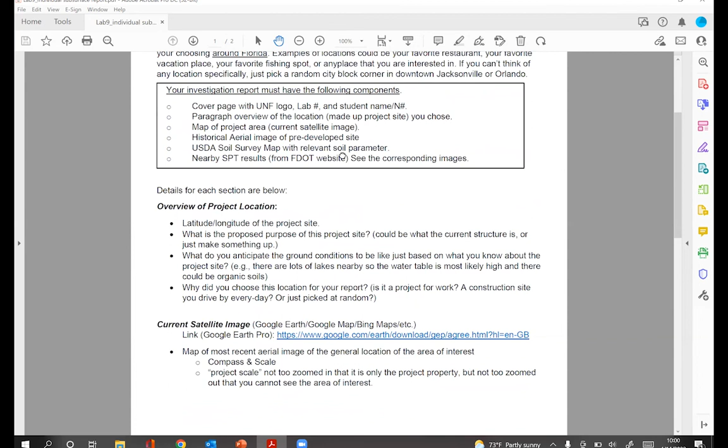I want you guys to be used to producing or using these online resources that are available for free, because these are the same ones used by professionals. This is an individual report and it doesn't need to be super comprehensive—just make sure you include all of these sections. You could do a page for each one or a couple paragraphs for each one, and please still try to keep it professional with the format requirements.

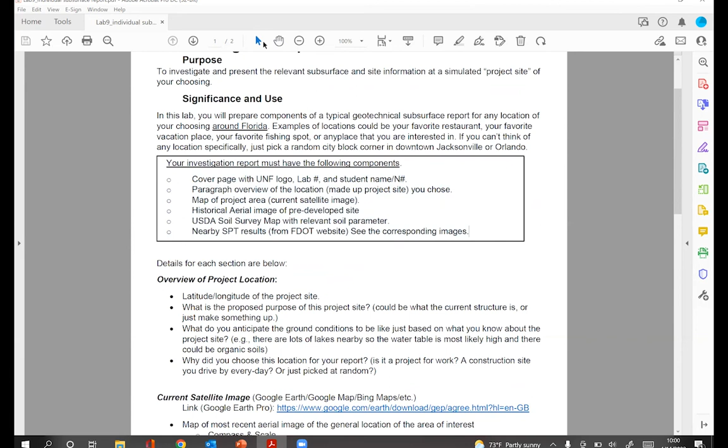Go ahead, you can get started on this one. It'll be due whatever week I said at the beginning of the lecture—I don't remember what I said. If there's any questions or you need help picking a location, just let me know and I can choose a random site for you to use if you don't want to try to find something on your own.